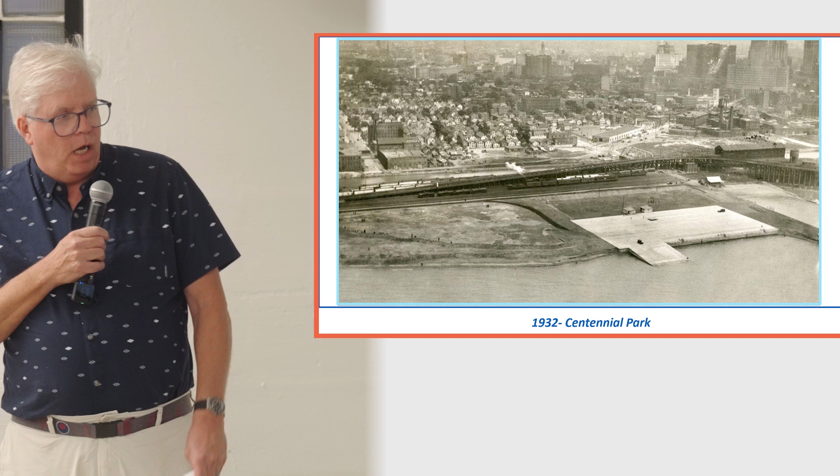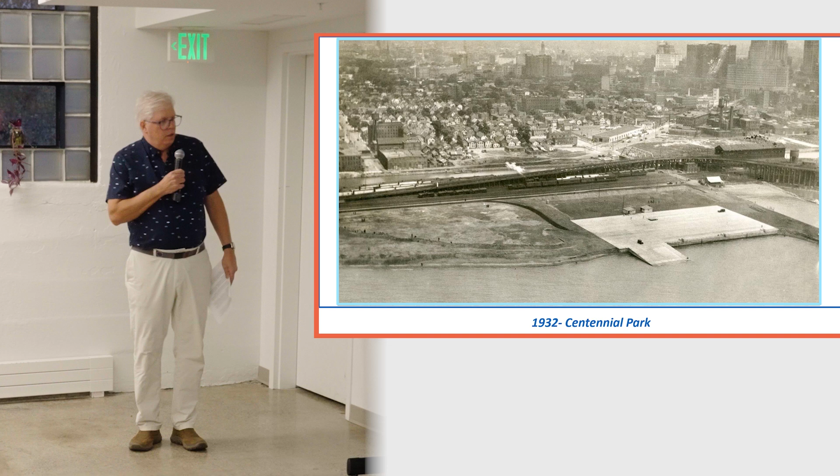View of City Hall from the bridge itself, and I agree you can't know where you're going if you don't know where you've been. This is a view of the park in 1932, freshly seeded, Erie Canal, City Hall. The seaplane ramp still exists. This was previously underwater. It was created during the Colonel Ward pumping station construction.

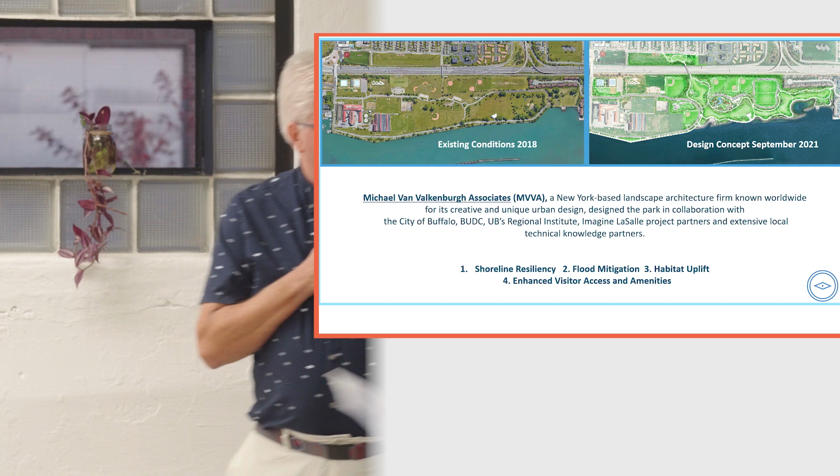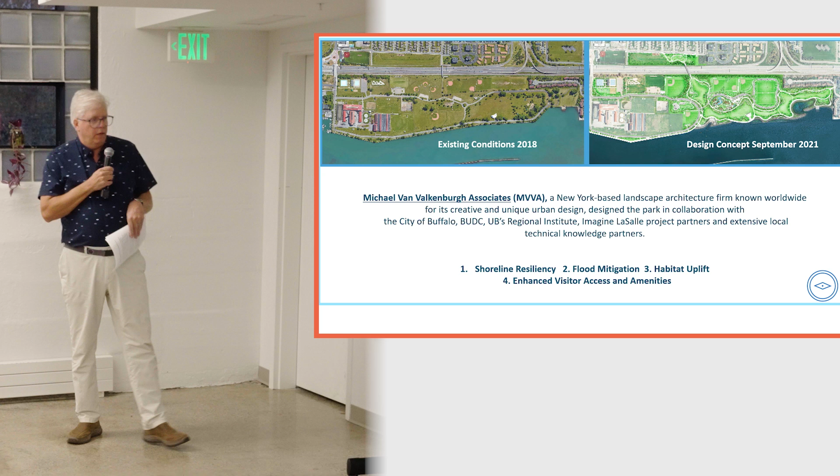So, fast forward, community benefit here. When Ralph Wilson Jr. passed, the original owner of the Buffalo Bills, made a $1 billion commitment to his foundation to spend $500 million in Detroit, $500 million in Buffalo. Through a visioning process in 2018, Michael Van Valkenburgh led the community through a visioning process. Existing conditions 2018, design concept 2021, four major tenets: shoreline resiliency, flood mitigation, habitat uplift, and enhanced visitor access and amenities. That's where this bridge falls in.

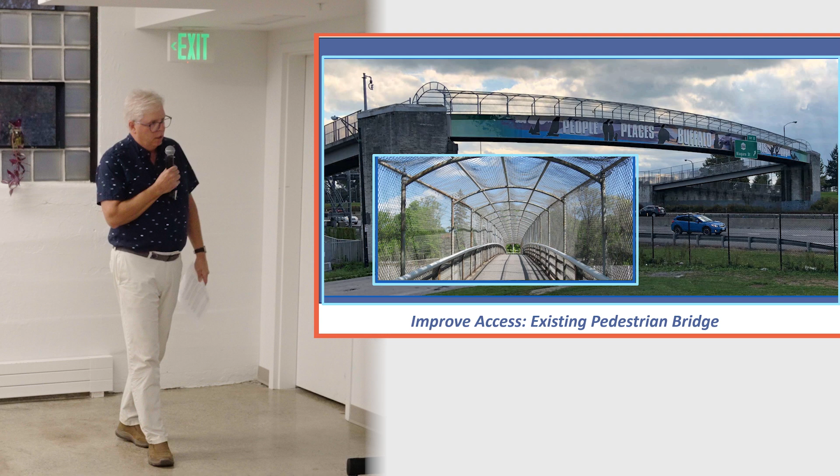Existing conditions, right? Improve access across a pedestrian bridge. Non-ADA compliant, doesn't feel very safe. I don't know if I'd let my chickens run around in here. It doesn't say welcoming. Wasn't ADA compliant. It was identified as a barrier to access to the park.

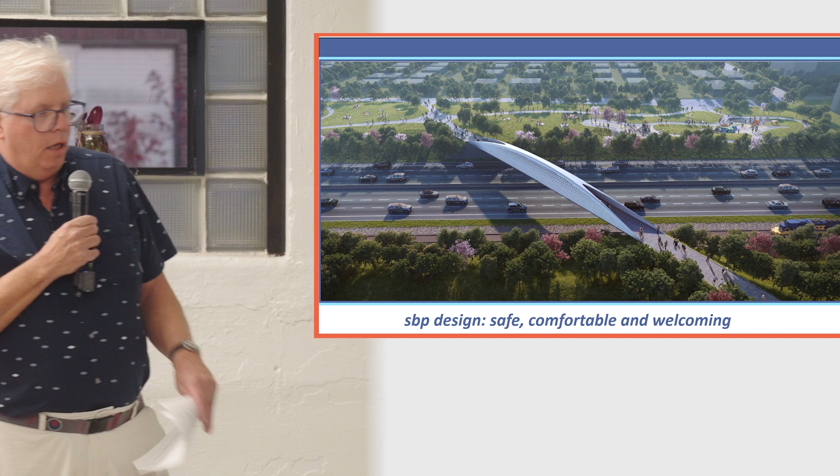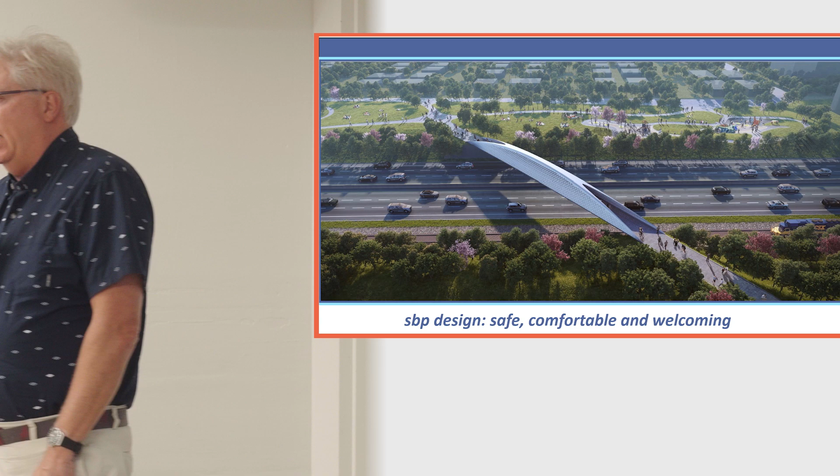A design competition was run for the University of Buffalo, Bob Shibley and his group were running that. SBP out of New York City won the design for a safe, comfortable, welcoming, 260-foot long, 220-foot steel frame structure to span the 190. You're looking there from the park towards the west side.

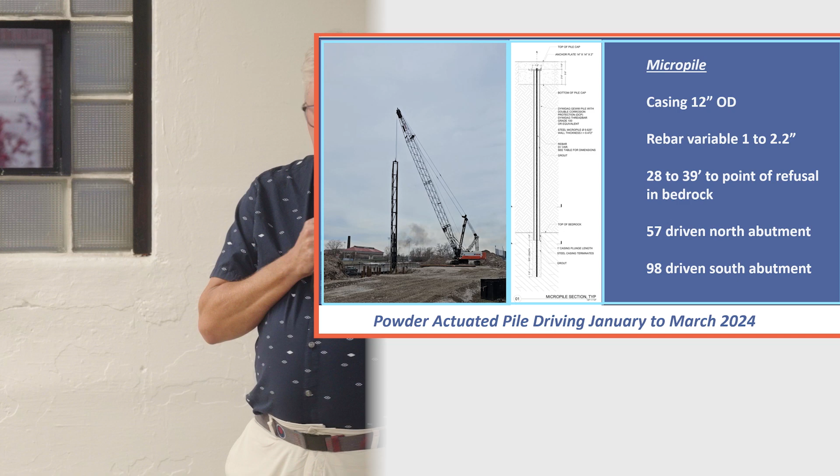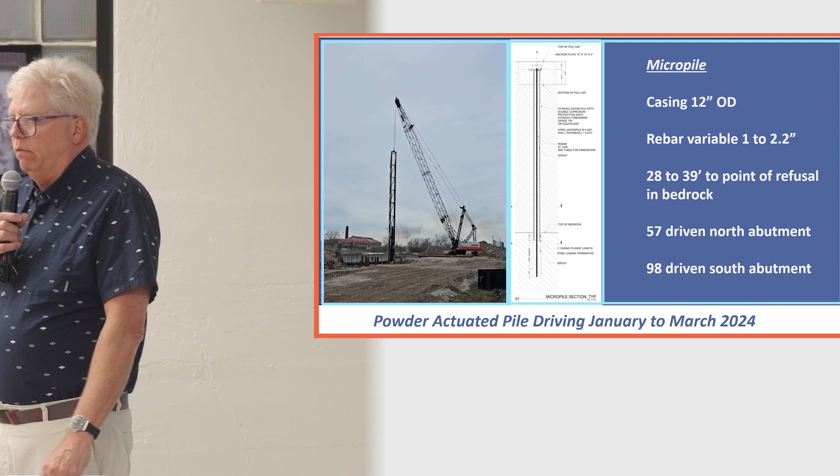Too bad there's no volume. We've all heard powder-actuated pile driving going on, the sound of development. I'm a big proponent of a lot of this work taking place on site. You don't get the benefit of seeing, but it's foundationally, no pun intended, important to the longevity of the product.

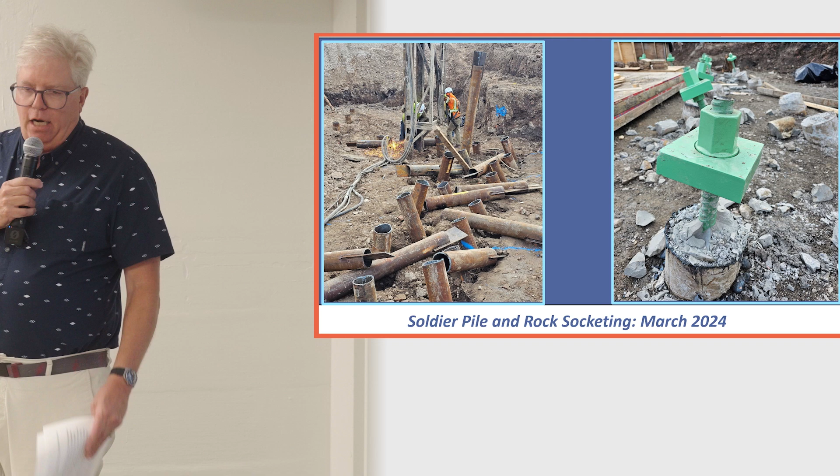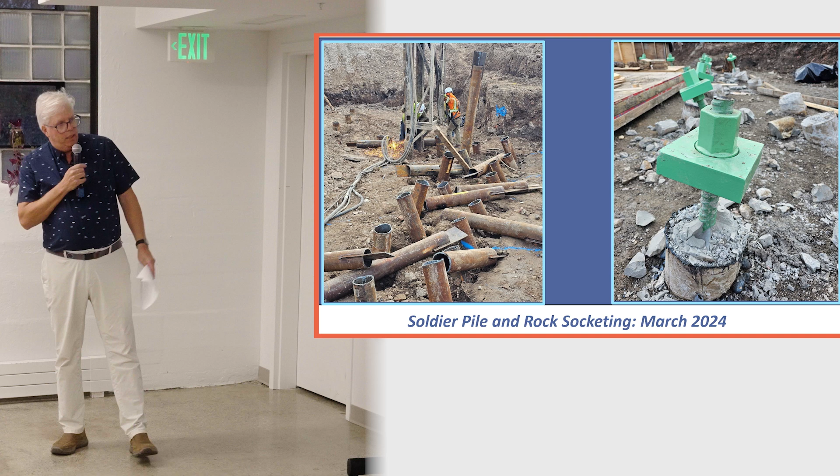So here's pile being driven. Not everything was driven 90 degrees, a lot of offset pile. This is a rock socket, which the rebar is drilled actually into the bedrock about 3 or 4 feet, filled with grout. This nut and bolt system is put on top of it.

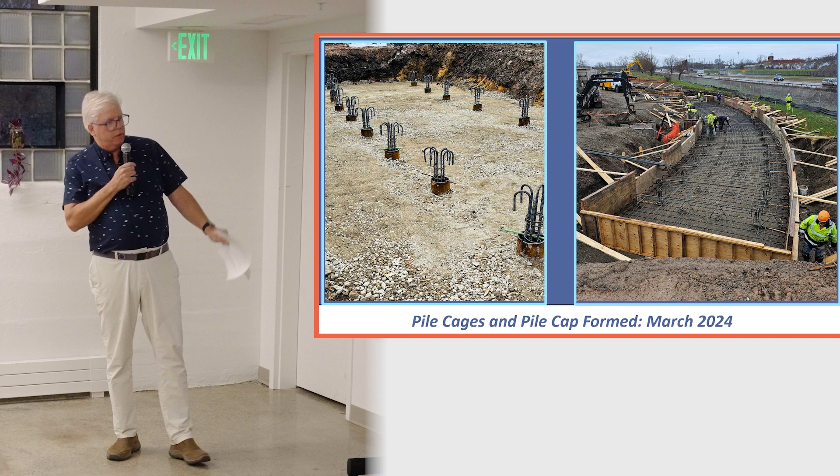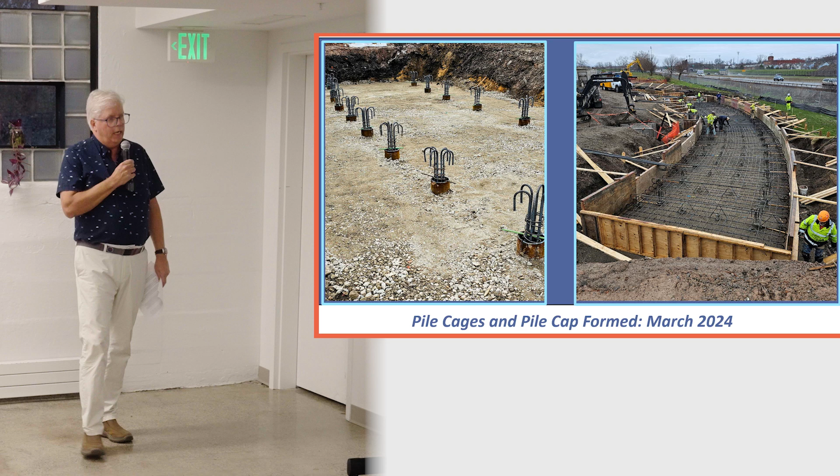Here is the south abutment's pile cap and rebar cages. So this is what the abutments of the bridge reside on. This is actually a 3-foot thick pile cap, a lot of rebar, a lot of people working on it. We had very favorable weather conditions this past winter for building. Hopefully we got more of that coming.

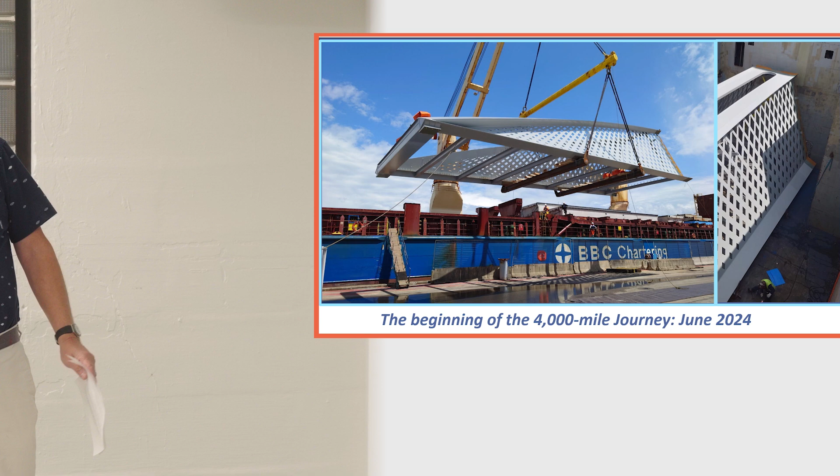4,000-mile journey. It was manufactured in Italy by a corporation named Cimolai. On June 2024, it was loaded onto a big trans-Atlantic vessel. It actually landed in Albany 10 days quicker than anticipated because they didn't pick up any portages along the way. Normally you pick up somebody else who will ship something with you.

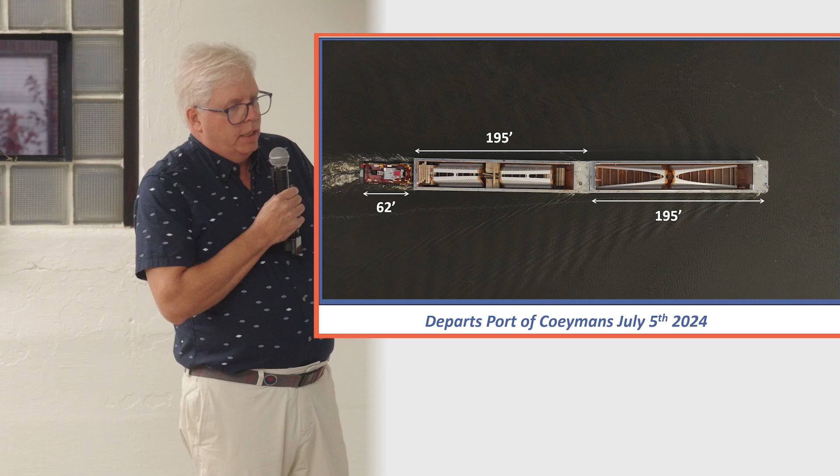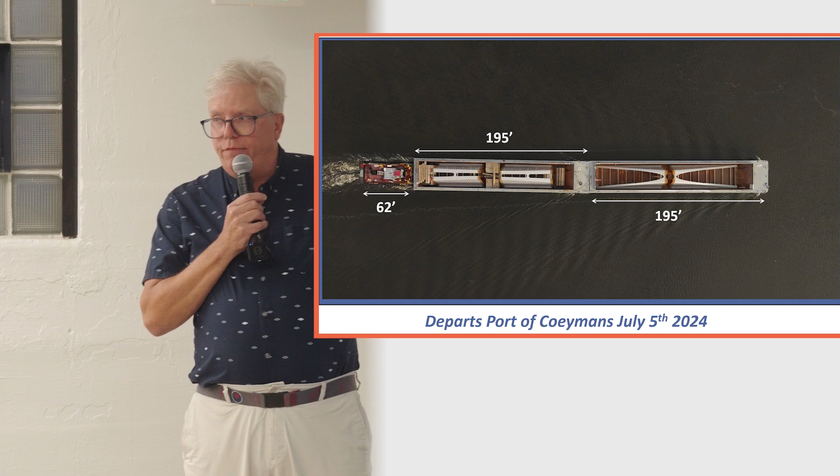This is leaving up the Hudson River from the port of Coeymans, just south of Albany, July 5th, 2024. These are 2 Jeffboat barges, 30 feet wide, 195 feet long, with a 62-foot long, 1,200 horsepower tugboat pushing up the way.

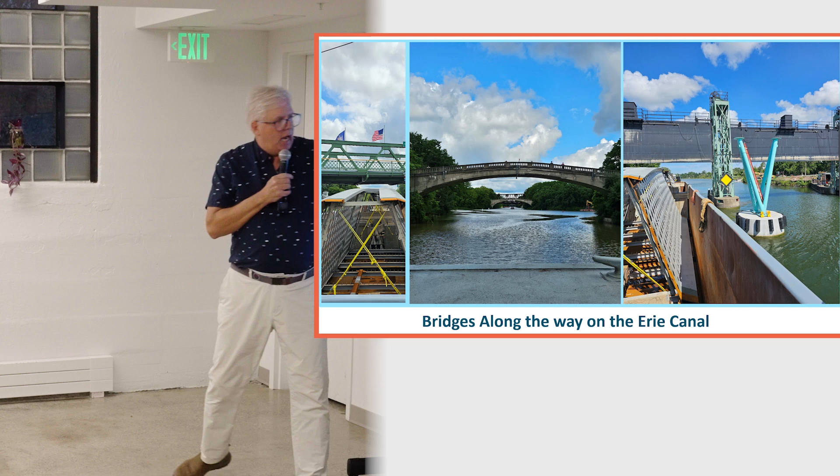So we came up the Erie Canal in 10 days, you can notice the difference between the previous slide and this slide. Oh, there's other boats. It's very narrow. We ran a very big campaign to get people out along the way to look at it. This is a journey I was on from East Henrietta across the Genesee River to Albion. Here's the view from the wheelhouse, 4 inches of clearance, 4 inches of clearance.

This is a pedestrian bridge abutment that the Ralph Wilson Foundation is funding in Brockport. So it was a fine balance between...

Lots of people coming out waving along the way, right? This was funded by Ralph Wilson. Part of my job was to carry the Bills flag. I had a little Bluetooth speaker playing the shout song. The guys on the boat were like, okay man, enough of that, but people along the way were into it.

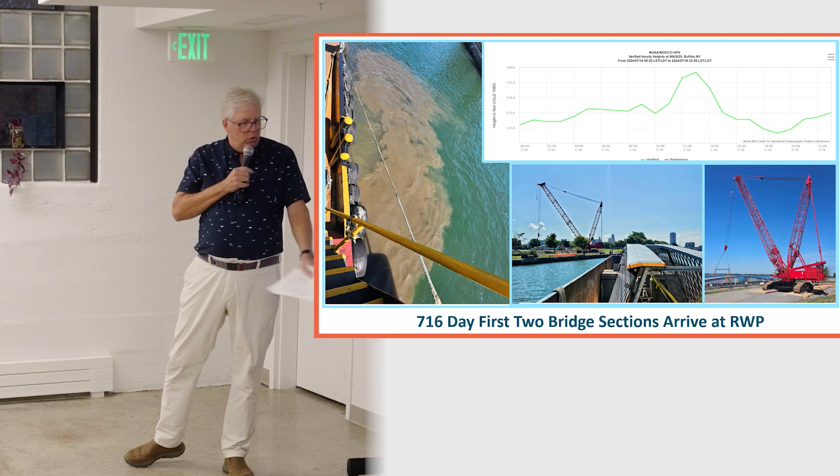I was saying it's a fine balance between being just below the bridge and not dragging on the ground. So 716, our area code, July 16th, we were to land at the shores of Ralph Wilson Park to a lot of fanfare. This is a 660-ton crane to lift the bridge sections off. Okay, we're coming up. Here's noon on 716.

Oh my God, there's a storm. This is lake level. Boom. Then all of a sudden it dropped 4 feet. That other picture was us in the mud.

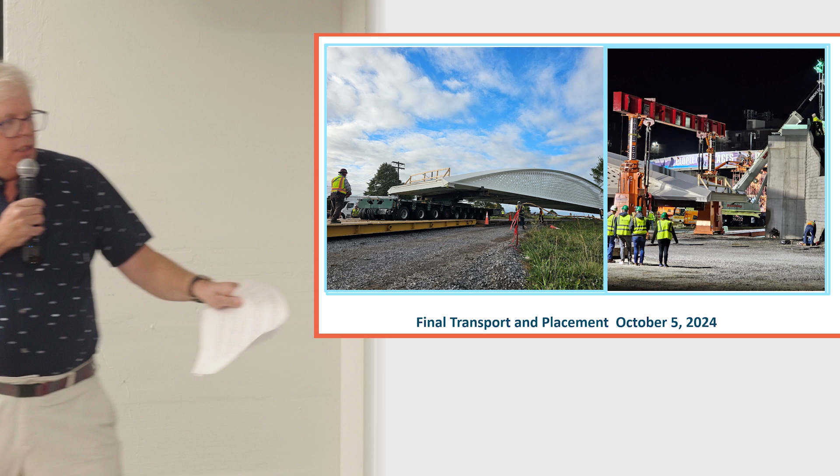These are some self-propelled mobile transporters. This guy is literally controlling the front axle by a joystick. These wheels not only go forward, but they can turn 90 degrees, so this is getting into position.

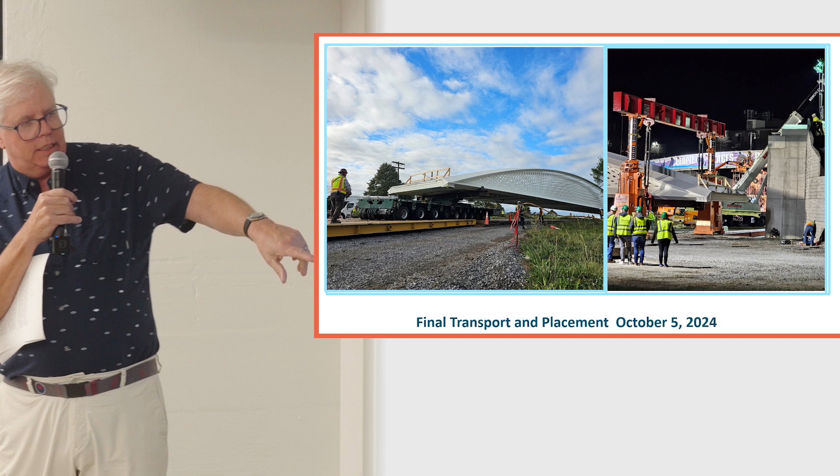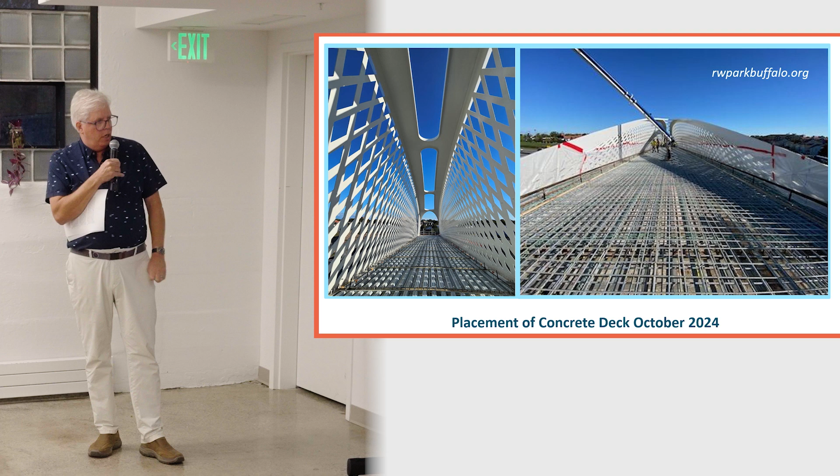On the far right is October 5th, we shut down the I-190 from 9 o'clock to 11 in the morning to place this massive 260-foot structure. And just last week, we were pouring concrete on the deck.

So lots of blue skies when you cross the bridge, and it will support yourself and your family and your bikes and your scooters and all that fun stuff. So can't wait to welcome you back across the bridge when it opens up.